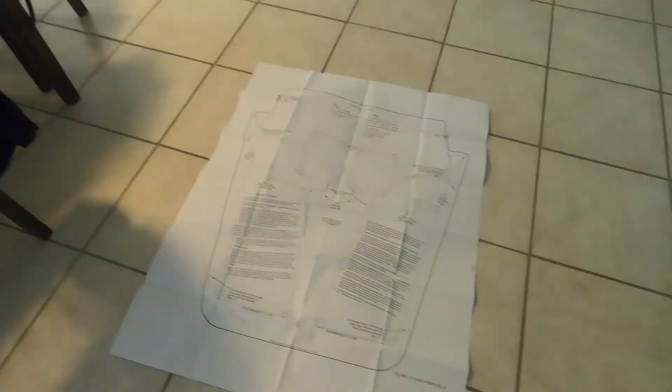But today we're going to work through the process of putting the hood louver onto the vehicle. Okay, so this is the template that you get with the Poison Spyder Hood Louver. This is before you cut it out, but it's got the instructions printed directly here on the template. It's pretty cool. Let's see what's the next step, and we can go from there.

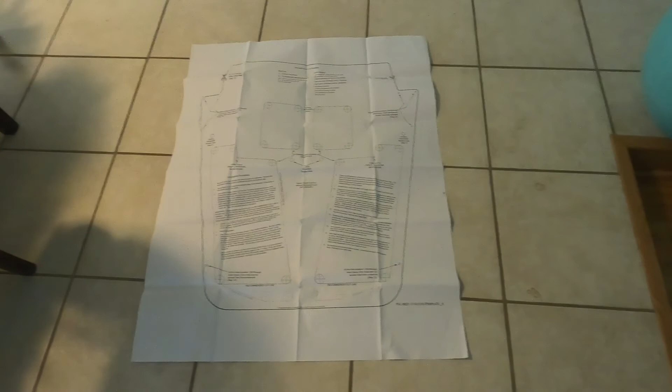I'm sure we're going to cut off the excess paper, and then start doing our punches on the hood, etc.

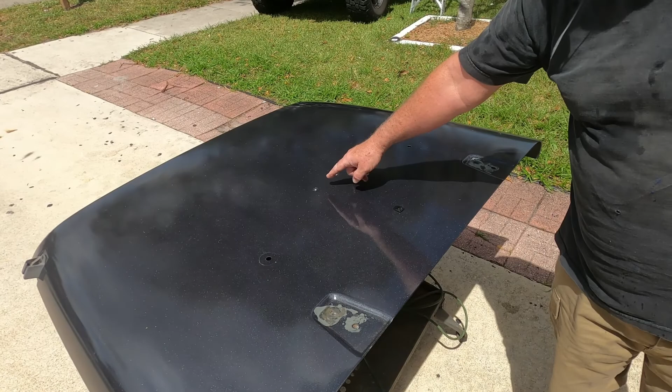All right folks, so we got the hood off the Jeep. We've removed the hood loop, footman's loop that's on top, and the rubber bumpers here and here. We've got to do some touch-up paint. It looks like when I pulled the hood latches off, it pulled some of this off. But that's not a big deal because it's going to be hidden most of the time. I just need to hit it with some stuff.

So we've cut out our template. Next thing we're going to do is lay out the template on it, and it mounts to these, if I'm not mistaken. So we'll get that on there, tape it up, and see what it looks like.

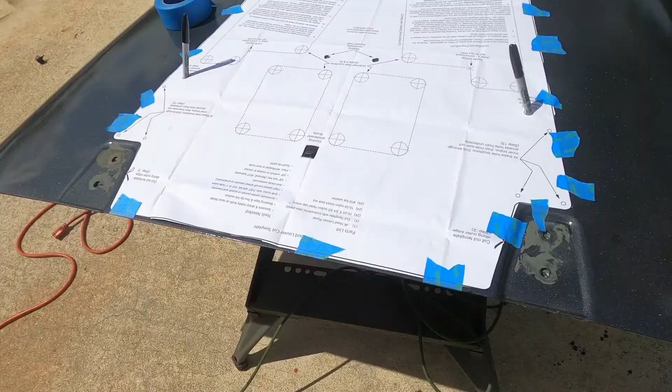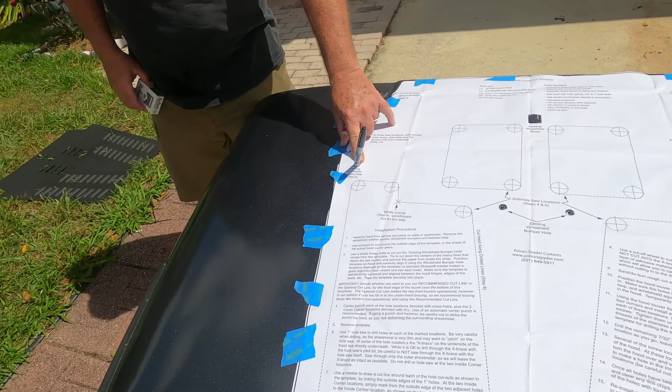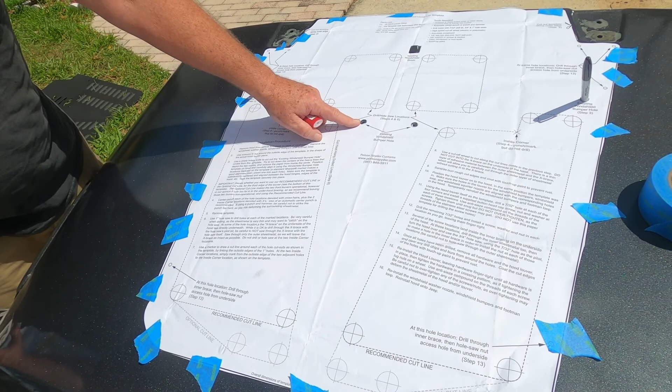Okay, so this is what the template looks like once it's on the hood with the cutouts. You've got the cutout here, and the cutout for the windshield bumpers. We used some Sharpies to stick in there, just to help us put it where it needs to be. It's a very windy day here today, so we used a lot of painter's tape to get it where it needs to be. The holes for the footman loop match up, so we think we've got it pretty much straight. Then we'll go to the next thing.

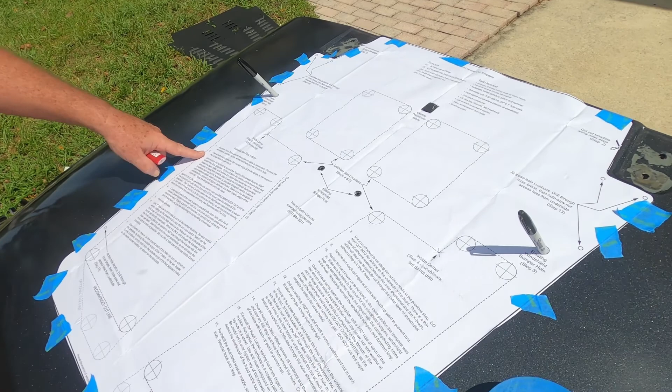So that was step 3 on the instructions. First one was to remove the hood, then cut out the template. Now we're going to center punch all the holes located with an X that we opt to work through. There's an optional cutout line here that we're not going to follow. We're going to follow the recommended cutout line on this installation.

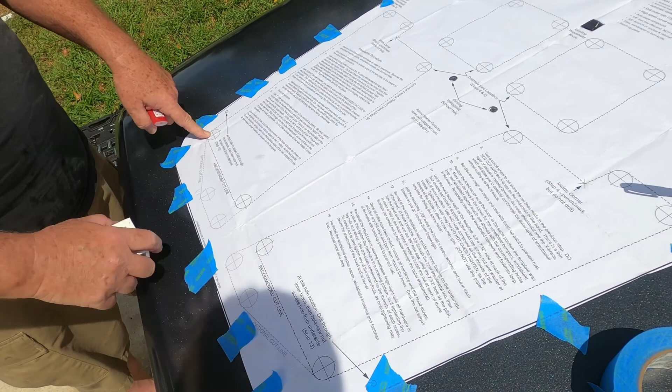So we've got to center punch everything, then we get the pleasure of removing the template with all the tape, and then use our 1-inch hole saw to pop holes everywhere, including right here it looks like. Okay, so that's what we're going to be up to next.

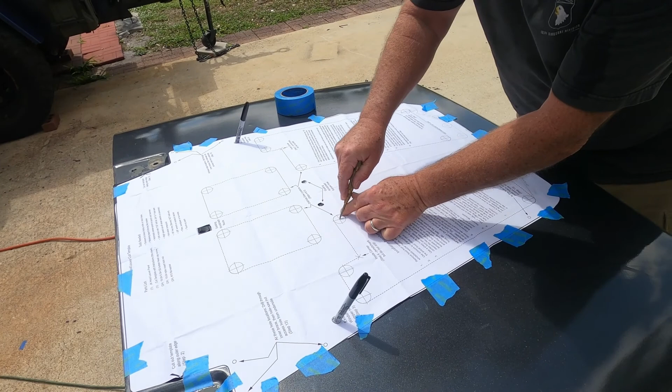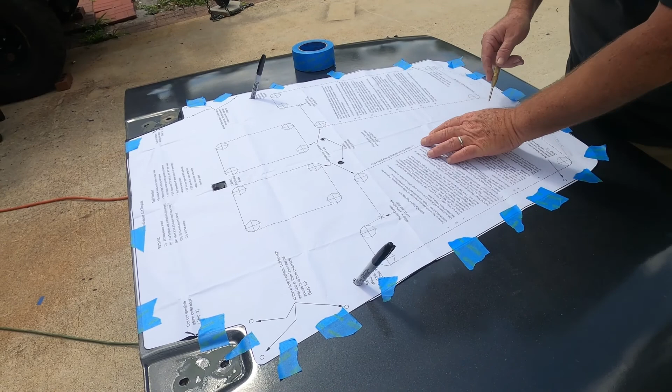Here we're using the automatic punch, which is recommended. Make sure you've got a sharp drill bit for the next part. That one's done, I'm going to do those last. And I'm pulling the template tight every time I put one on, just to make sure I've got it where it needs to be.

Wait, is it too late to stop?

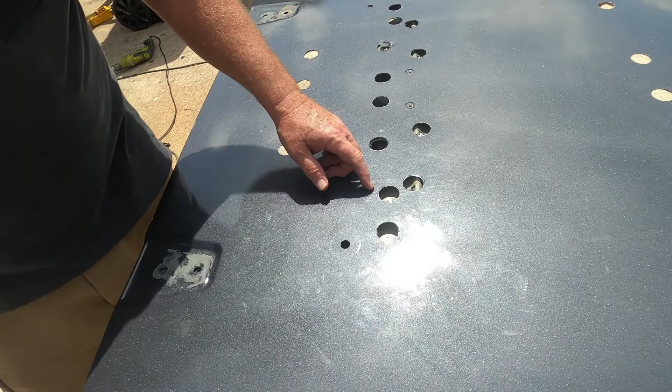Oh, okay, so we've got all the holes drilled. You have to be careful, of course. You don't want to put the 1-inch holes down through the supports. You can go ahead and put the small drill bit through, because that's just the way it's designed.

I've got one here that snagged on me. I'm going to have to clean that one up and get it off. That was my fault — the drill bit for the hole saw came out while I was doing it, so it didn't stay tight into the drill. So we'll fix that, and that's it for right now.

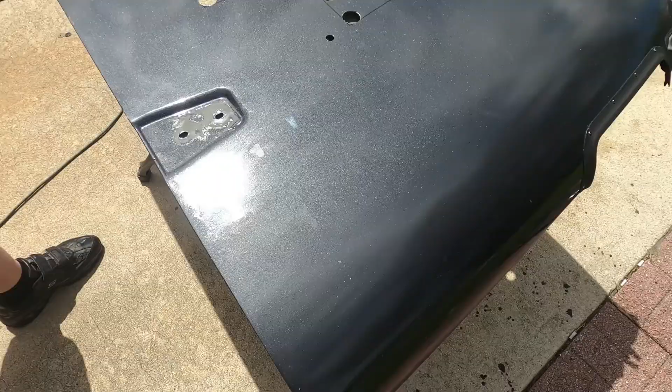Okay, so we've got the holes drilled, and hopefully in the sunshine you can see where we've traced out where the cuts are going to be. So next is the critical part of actually cutting it and not ruining the underside bracing. That ought to be interesting and a little nerve-wracking.

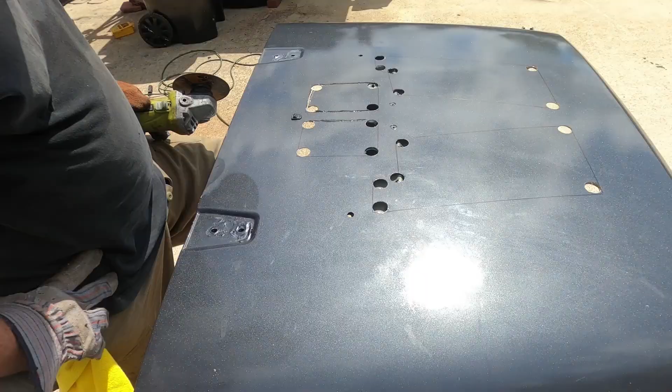Okay, so we're starting our cuts. You see we've got a couple cuts made over here. We're going to finish up over here. This is an easy way to do it in my mind, because I'm cutting all the ones in one direction, then I'll go back and cut the other ones the other direction. Angle grinder, cut off wheels — that's what I'm using.

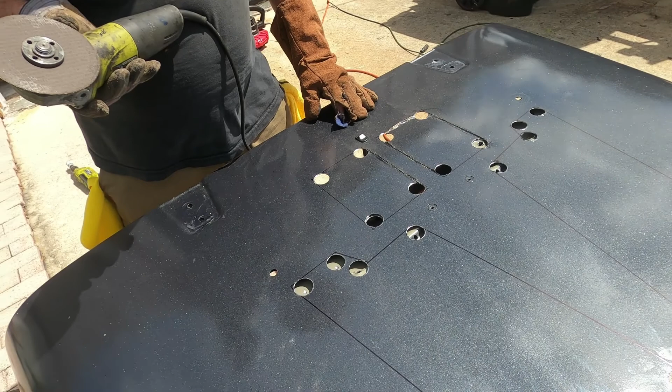And yeah, I'd say it's too late to not do this at this point. So everything seems to be going okay. I did get that one out — it did burr it up a little bit. We'll straighten that up, it's all going to be hidden under the louver. So expect the unexpected when you do this. I got a little paint bubbling right here from the heat.

But of course, one of the steps in this process, once you get everything drilled and cut out, you're going to do a little light sanding and put some touch-up paint on anything that's bare metal. So we'll be doing that.

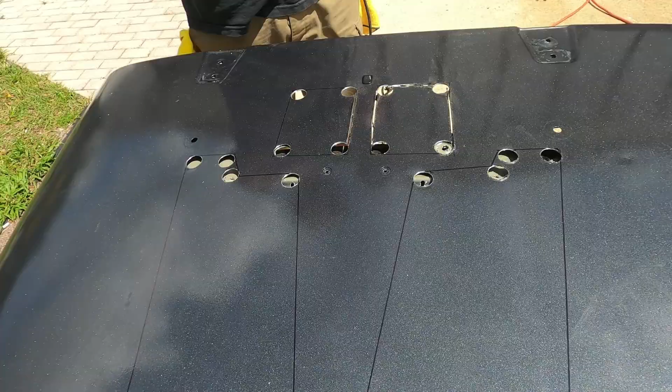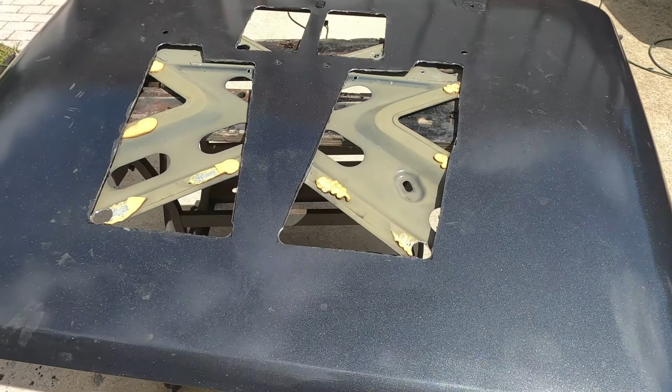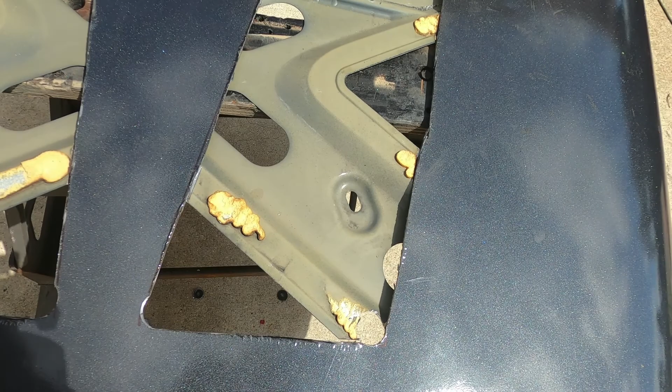Okay, so here you can see the rough cutouts. When you do these sections that have adhesive on it, try not to cut through the brace. Even when you get it all cut out, it's going to stick to these things, so you may have to pull up on it. Expect a little resistance as you pull these off, don't think your cuts aren't correct. The upper ones really didn't have a problem, so I'm not concerned with those.

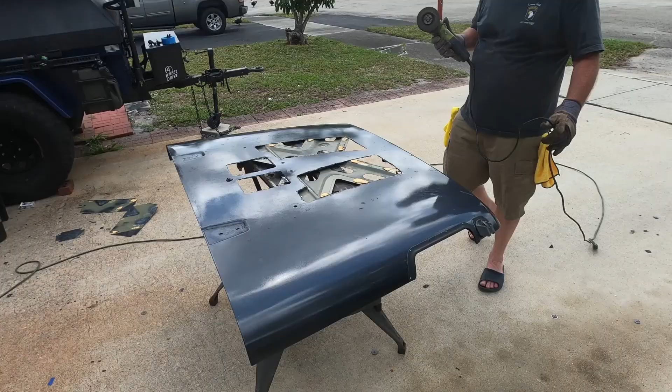Okay, so we've got our grinding wheel on, so we're going to smooth up some of these edges and get it ready for painting and stuff like that. We're not going to film this, it's going to be really loud, but we might give you 10 seconds or so. So here we go.

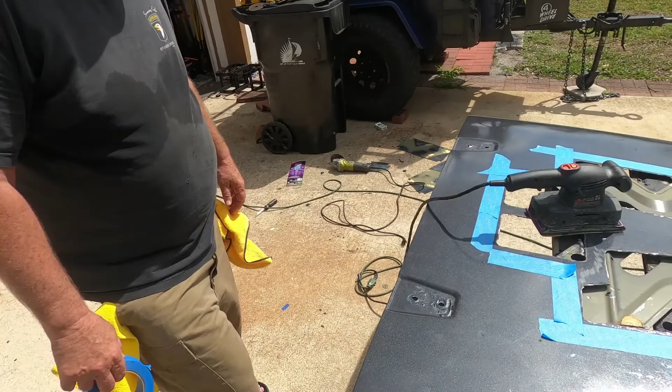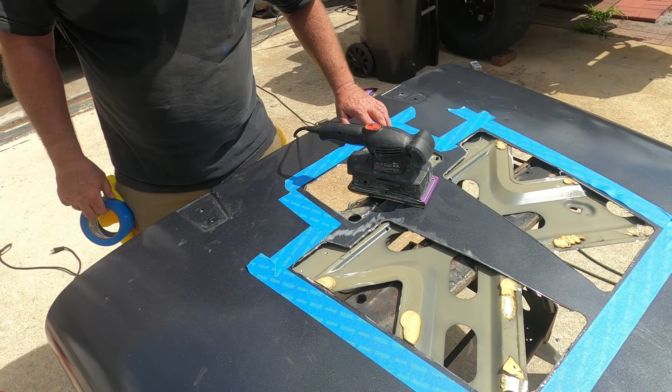Okay, so we've gone ahead and hit it roughly with that grinding wheel, got the big knobs out of it, I hope. I'm going to come back with a Dremel here in a minute, but before that I'm probably going to sand it down so I can start thinking about repainting it. I've taped it out because I don't want the sander to grab any paint outside of the actual hood louver. The louver's bigger than the blue tape, so it shouldn't be a big deal.

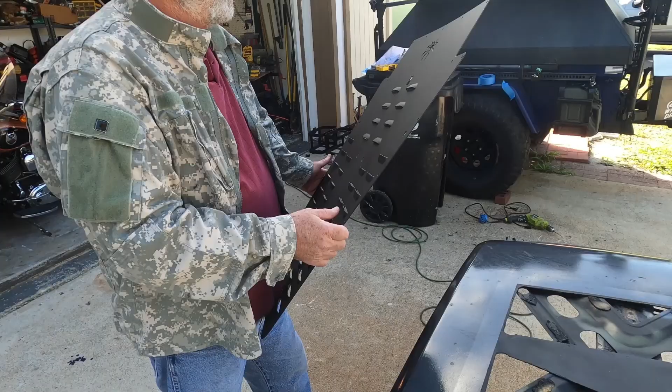Okay folks, so we've got our touch-up paint all on. So now our next step is to position this on and get our footman loop and some other things on, just to try and hold it where it needs to be. And we'll use this as a template for the instructions to get the rest of the holes drilled here.

So it's a little cold out here this morning. We had a cold front come in last night. There we go.

So these push down and kind of turn. It helps to grab them from the bottom. So I'm pulling it and pushing, pulling from the bottom, pushing from the top. Okay, so that's about where it needs to be.

And then we'll use the louver itself as the template for everything else that we're doing.